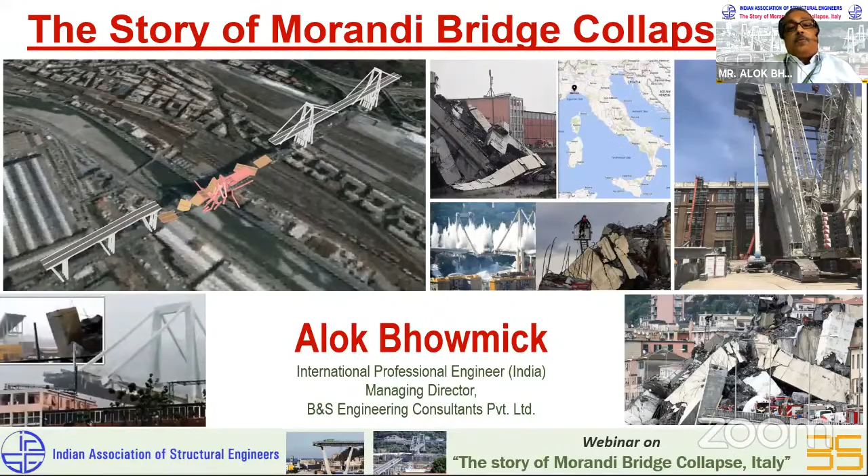This is the broad outline of my presentation. I will talk about the bridge, I will explain the structural arrangement of the bridge. Then I will spend a little time discussing the designer, Riccardo Morandi, and his works. We have to see this bridge design and the failure in the context of the works done by Riccardo Morandi.

We will discuss the history and maintenance of the bridge, what has happened since its construction in 1967 till its failure in 2018.

At present, the inquiry and forensic investigation is still on, the report is not yet out. So whatever possible causes of collapse we will be talking about will be based on information available in the public domain, works done by individuals, academicians, but not the final version. The final version is yet to come. It is hoped that by December, the report will be in the public domain.

Then I will spend some time also discussing the demolition of this partly collapsed bridge, how it is done.

It is a lot of learnings, even from the demolition of the bridge, which took place subsequent to a partial collapse of a particular span of this bridge. I will also spend some time on the new bridge, which is already executed and in service. In a record time of 2 years post collapse, a new bridge has come up there. This whole journey from the collapse of the bridge to the inauguration of the new bridge is an amazing story, which for every civil engineer and structural engineer is worth emulating.

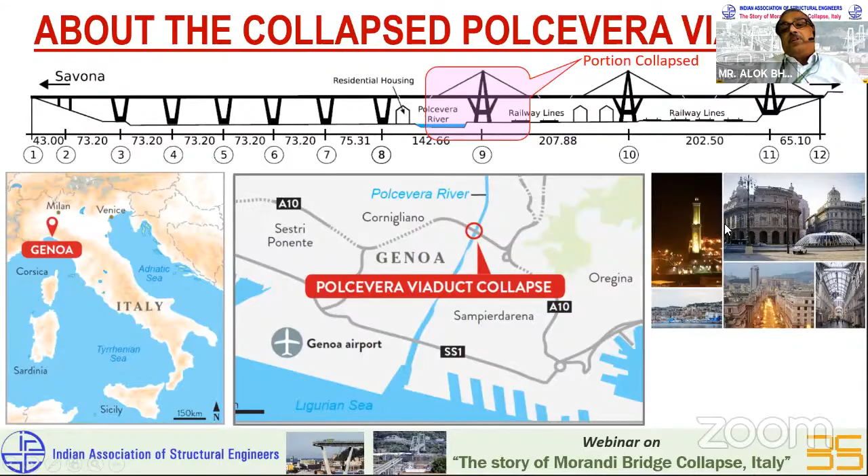What I will try to show you is a small clip of about 35 seconds of the actual collapse, which was captured on one of the cameras. This is just a small clip to show you how the bridge collapsed.

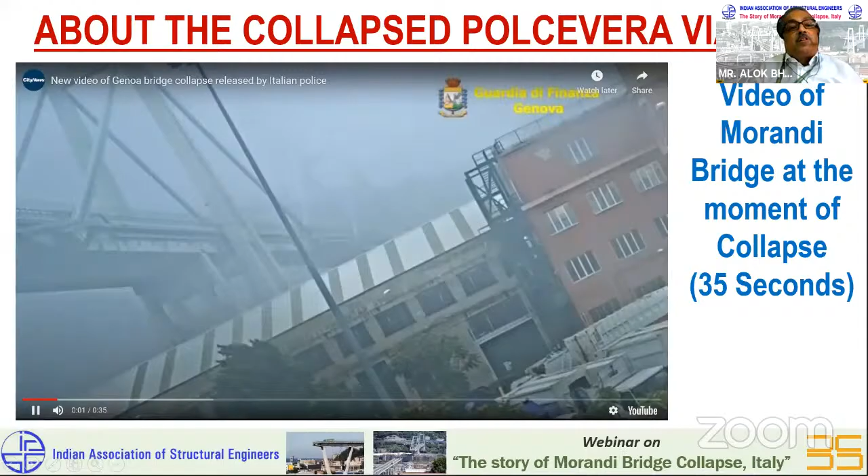Subsequent reports show that the bridge collapsed due to failure of one of the ties of P9, which led 1 out of the 4 at the top to collapse first, and subsequently, because of the torsion, the bridge collapsed. It collapsed sequentially, progressively. Though from the video it is not very clear, this is based on the reports. The most authentic part will come only when we get the final report from the investigation agency.

Now let me discuss a little bit into the structural scheme of the bridge, so that we understand it in little greater detail structurally.

This is a typical Morandi bridge. This is a signature of Morandi. How is it different from other cable stayed bridges? A Morandi bridge is basically a purely concrete bridge. Even the stay cable is made of concrete. The steel is encased by concrete, and therefore it is a pre-stressed concrete tie, which is unique to Morandi design.

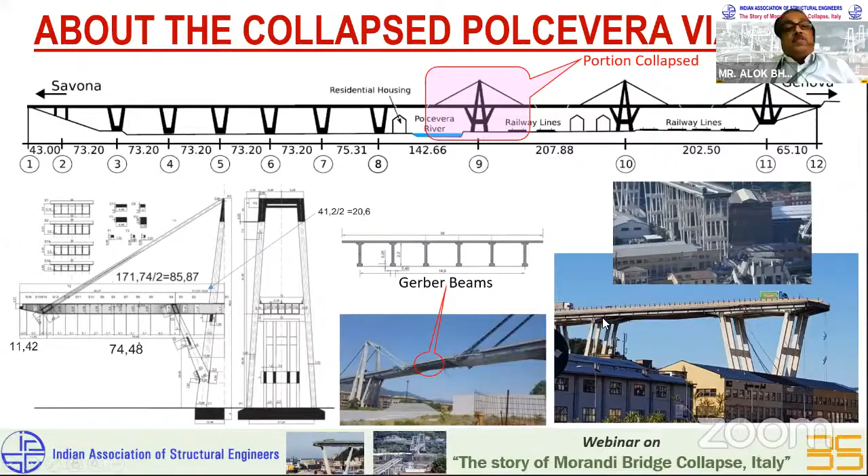This is the kind of terminology they use for the deck, P9, which collapsed. These are stay cables - concrete stay cables. The A frame which supports the stay is called the antenna. As I mentioned, the suspended span is the Gerber beam. This is the deck, which is also very interesting - if you see in between, this is the soffit of the beam. It's a 5-cell box girder, but in between the soffit is missing.

The soffit, if you cut a cross section at the middle of this PSC multi-cell box girder, is there only in three cells continuously, but near the supports where this V-frame is joining, you can see that the soffit slab is full. So wherever you need compression at the bottom, the soffit slab is increased as per the structural engineering requirement.

So one of the uniqueness of Morandi's design is he believed in flow of forces and optimization of design. I think in recent lectures we heard from Professor Holger Svensson about cable stayed bridges, we hear the same thing - there is a lot of emphasis on economy of design and optimization, and I think this particular detailing reflects this very clearly.

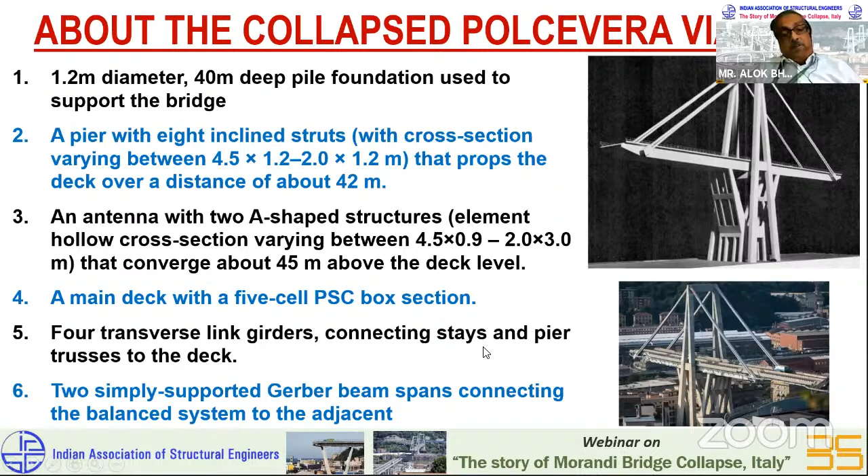Now let me discuss a little bit about the difference between Morandi Bridge and other cable stayed bridges. What you see on top is the typical Morandi Bridge, which has been reproduced only at three places - first in Maracaibo Bridge, Venezuela, followed by this one, Polcevera Viaduct, and at other places.

But one unique thing about Riccardo Morandi is nowhere has he completely copied the design. Every design may look outwardly similar, but there are distinct differences. Whichever new bridge he has done, he has always improved on the first one.

For example, in Maracaibo Bridge, Venezuela, he did not use the encased concrete tie - he used the normal steel tie. But he realized, probably after construction, and while doing this Genoa bridge, he changed the nature of the tie. He encased it in concrete and then did pre-stressing in the second stage as well.

Now the distinction between a normal conventional cable stayed bridge at that time, or even today for that matter, and the Maracaibo or Morandi Bridge, is that Morandi used only a single tie, whereas the conventional practice is to use multiple ties. Today, when we look back, we certainly find this multiple cable-stayed bridge type has many distinct advantages compared to Morandi's single tie.

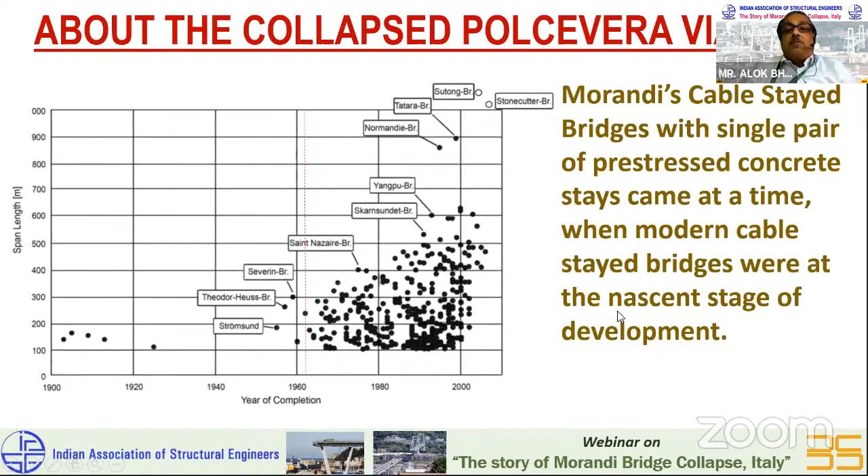Now let me get into some construction details of this particular bridge. Construction photos from the 1960s reveal that traditional methods were used for the design of the substructure. You can see the tall piers, 45 meters high, and this part of the deck was done cast in situ with staging, a very conventional and traditional method. You can see here various stages of construction, which are self-explanatory.

This shot shows each of the three towers: P11, P10, and P9, in various stages of construction. It's a very interesting photograph because in one shot you can see all three stages. In P11, for example, the tie is already in place, and only the Gerber beam or suspended span is left to be placed. In P10, the A-frame is completed and the cantilever part is almost completed, and it's time now to put this tie in place.

And in P9, this is the one which eventually collapsed. You can see that only the central portion of the PSC box girder was completed, and the cantilever construction had yet to start.

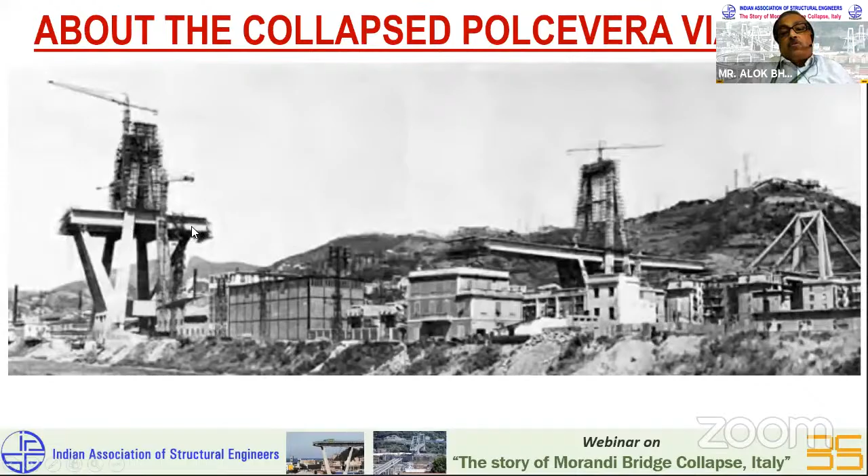This is another picture showing the cantilever construction in progress, a conventional cantilever method. What is very interesting here is the auxiliary strands. On top of the deck you have these auxiliary strands, which are required because we have a very large cantilever, and this cantilever, once the tie comes into place, will no longer behave as a cantilever. Therefore, in the permanent stage you don't require that many cables, and in the temporary stage auxiliary strands are used to reduce the use of permanent cables.

This is another picture subsequent to this, where you can see the cables now being installed, and this is the bottom view. This one shows these auxiliary strands on top of the deck and how they are being placed.

This is a blown up view of the concrete tie, which I want to spend some time on. If you look carefully, this stay cable consists of two distinct stays - you can see a gap here. The concrete stay bifurcates from somewhere here into two separate concrete ties. So if you cut a section here, there are two independent concrete stays, but as you go up, they join and become one. This is the cross section - at one location you see a set of cables, and at another cross section you see that the cables are of two types: the A cable and the B cable.

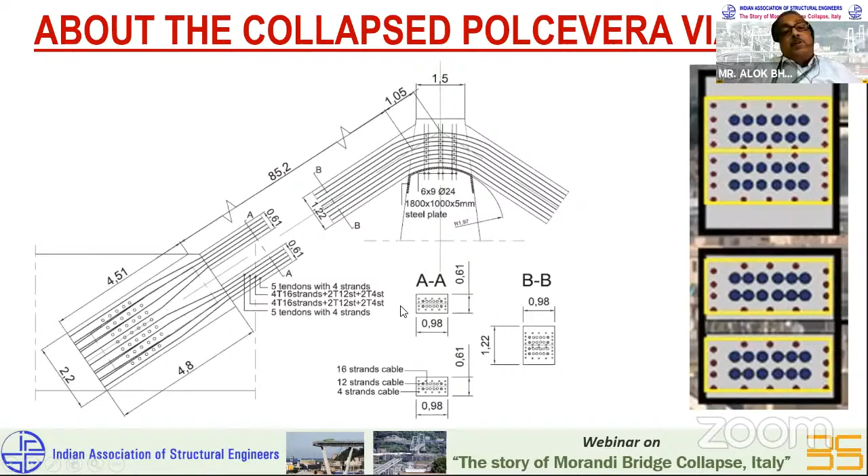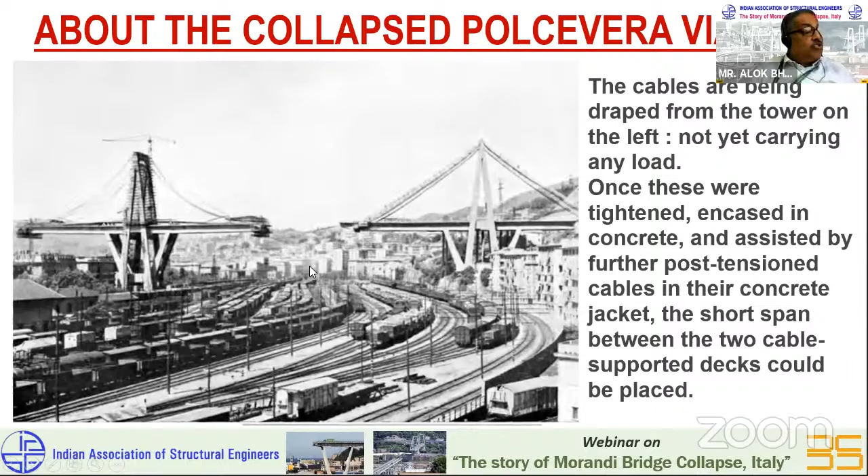This is another picture which shows encasing after stressing, being encased for concreting. All these are invaluable pictures which I could get from one of the journals, which is of course available on Google, you can search and get it.

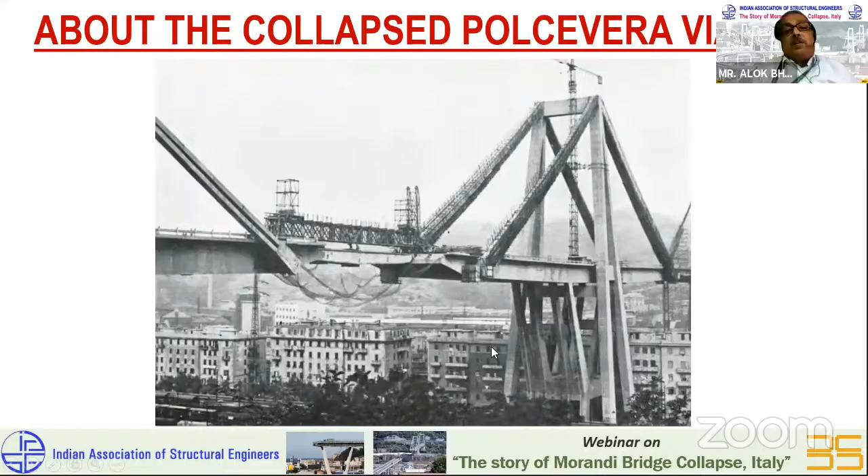This is a picture which shows how the Gerber beam, or suspended span, is being erected by using a truss on top, supported from both side cantilevers, a very conventional method for suspended spans. Only thing is, in this case, the suspended span is pretty large, 36 meters.

The timeline followed for the new bridge post-collapse is amazing, something worth emulating. On 14th August 2018, the bridge collapsed. On 9th February, demolition of the Morandi Bridge begins. In between there are so many activities. On 15th April 2019, reconstruction officially begins with the placing of the first pile. And on 3rd August 2020, the new bridge, which is 1 kilometer long with a completely new design, state of the art, is opened for traffic. So there are a lot of lessons to learn, even in the post-collapse scenario, how the project has been handled.

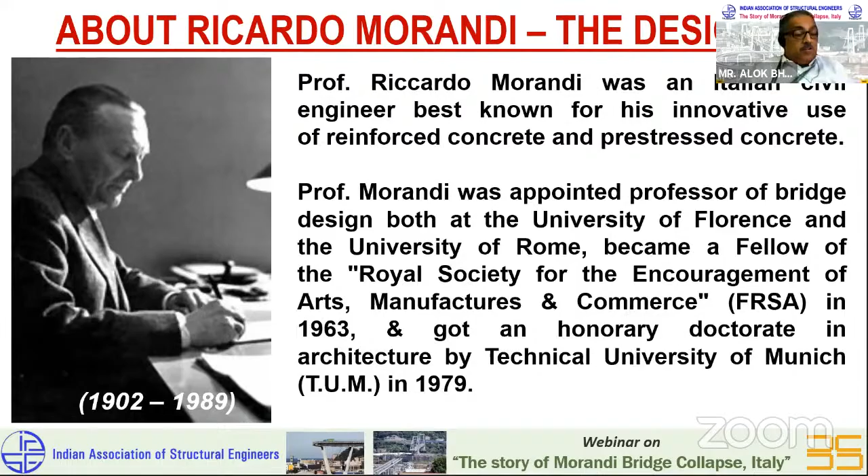Two undisputed protagonists from this era are Nervi and Morandi, and they practiced almost at the same time. They were competing with each other, yet at the same time they had a lot of respect for each other. In many talks Professor Morandi gave, he mentioned Nervi, and many talks Nervi gave mentioned Morandi. They had excellent communication. Interestingly, both had completely different styles of design.

Nervi's design had a trend of slender structures, symmetrical, with static balance, whereas Morandi's structures seem completely different, respecting the flow of forces. It would be a more conventional structure, a little bulky, but both designers always had their own unique style.

Some of the works of Riccardo Morandi: in the initial stage, after his initial 5-6 years in damage assessment of earthquake-damaged buildings, he went into consultancy and started working on large span structures. He started designing cinema halls and became very popular in Italy. Many cinema halls with large roof structures were designed by Riccardo Morandi. In those days, the cinema hall producers, Gemini, were very well known, and practically all the cinema halls of Gemini were done by Morandi.

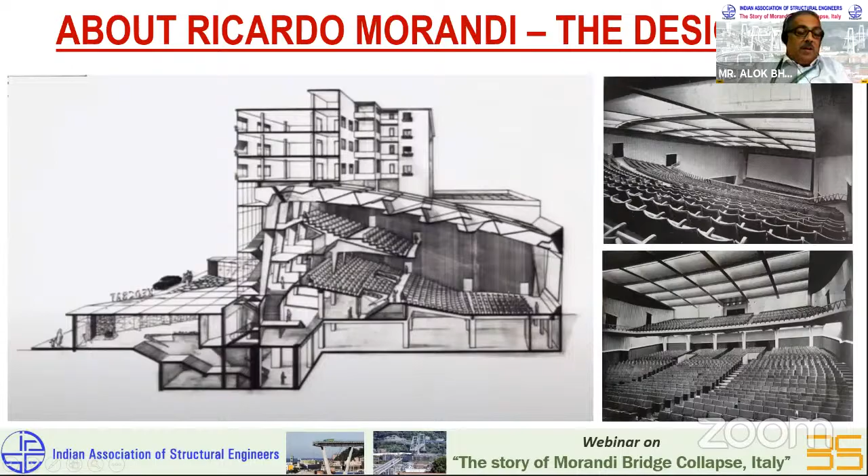Bridges were his passion, and you can see uniqueness in each one. It's not only the cable-stayed bridges, but even the arch bridges had uniqueness. It's very unconventional to have piers which are inclined, and every pier has a different inclination. If you go through the literature, you will note why this inclination is there.

This inclination is done purposely because the deck imparts a frictional force due to shrinkage, temperature, etc., and the inward force is more. So the piers are purposefully inclined so that the net bending moments are reduced in the pier, because the resultant force direction is always towards the crown of the arch, and that is what he has taken into account in his arch designs.

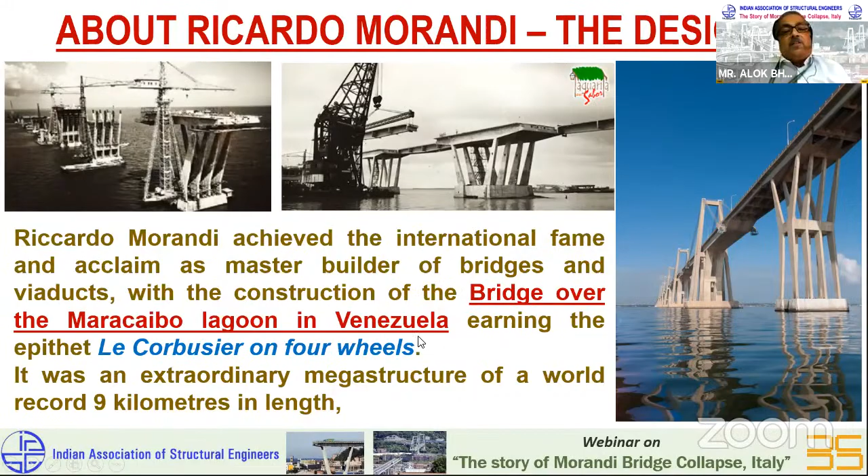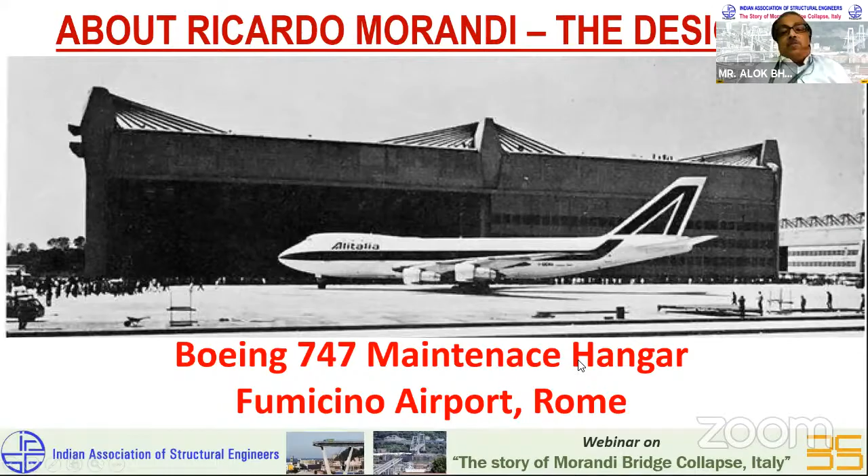There is also another similar airport maintenance hangar at Fiumicino Airport, Rome, for Boeing 747. All these are examples of some masterpieces by Professor Morandi.

Professor Tandon was mentioning in the opening remarks about a hangar, also on a similar concept, designed by Professor Tandon, inspired by the work of Professor Morandi. This is an airport hangar in Mumbai for Indian Airlines or Air India. I would request Professor Tandon, after my presentation, to speak a little about this particular structure, which is exactly on similar lines, with pre-stressed concrete ties.

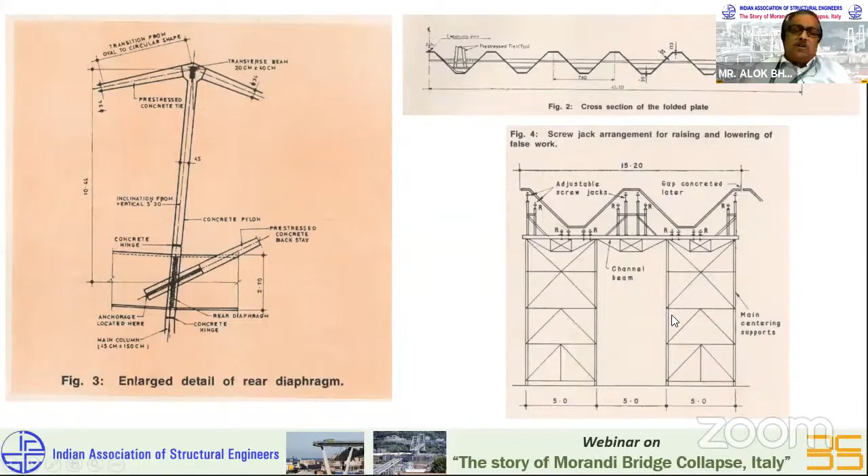This is another view of the same with folded plate. I think there is a lot of uniqueness in this. This must have been done in the late 60s or early 70s. Professor Tandon can throw some light on this later.

I just wanted to share one more thing about Professor Morandi to end this section. There was a lecture delivered by him in November 1961 at the Institution of Engineers, UK. Give me two minutes to read through some part of his speech, which is very interesting. This talk he is giving is on his paper titled Engineering and Architecture. I've just picked up a part of his speech.

He says: I, who speak to you, am an engineer, a structural designer, that is, a man who has been trained by the schools of his day to act as an intermediary between the ideas of the architect and the requirements of the constructor. The man who in Italy is still called the calculator of a work of engineering. I began, therefore, to be a calculator of structures in reinforced concrete. At first, my clients required nothing more of me than a structure which adhered exactly to the dictates of the designer, that is, the architect. Economical, easily built, and statically correct.

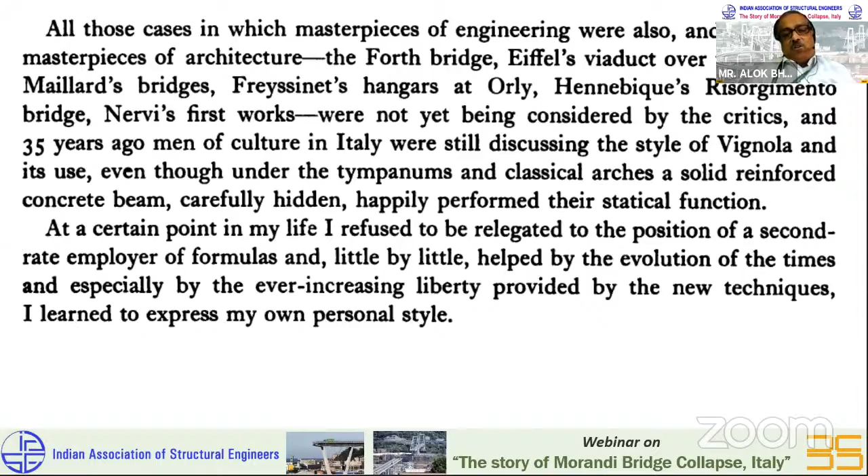At a certain point in my life, I refused to be relegated to the formulas, and little by little, helped by the evolution of the times, and especially by the ever-increasing liberty provided by the new techniques, I learned to express my own personal style. I very much liked this part of his speech, and I think it speaks volumes of what we are facing today, with a lot of lessons to learn from this.

So I come to the third part, which is the history of maintenance of the bridge. I will be quick now—I think it's been an hour, so I should finish in the next half an hour. The bridge had shown signs of distress and excessive deflection very early since its birth. This problem was visible right from the construction. Professor Riccardo Morandi himself was surprised to see the structure age faster than he had anticipated.

In 1979, he was part of the working commission of IABSE, and in one report he detailed a number of interventions to protect the structure against pollution from nearby factories and the salty sea area. This document, available in IABSE, is a paper he published in 1979 discussing the Polcevera Viaduct, in which he mentioned that this bridge certainly requires protection.

I will read from that report. It appears that the structure is struck directly by marine winds. The sea is about 1 kilometer away, which is canalized in the valley crossed by the viaduct. Therefore, it is a highly saline atmosphere, which also encounters, on its way before reaching the viaduct, a curtain of fumes from the chimneys of steel mills, and therefore becomes saturated with highly noxious vapors.

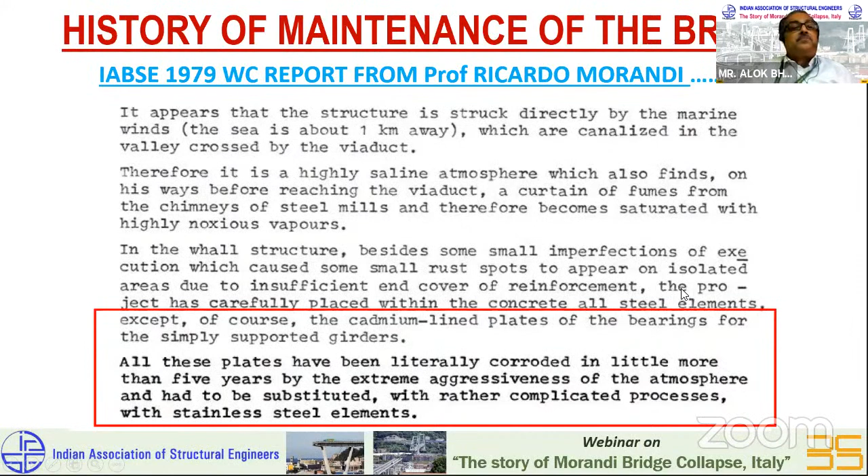In the early 1990s, during maintenance and repair activities, it was discovered that the structure had widespread deterioration, and many interventions were carried out in between.

A major strengthening intervention was done at Pier P11. I think Professor Tandon mentioned in the opening remarks that one of the panelists, Dr. Agostino Marioni, worked on this. I would like to hear from him after this presentation about the strengthening intervention on Pier 11 for the stay cables — extra new cables were added around the corroded ones.

For Pier P10, the interventions were limited, mainly concentrated in the section stretching to the crossbeam at top, as I will show in a diagram. For Pier P9, which actually collapsed, no intervention of any type was contemplated at that time in the 1990s. Attention was focused on the stays, not on the deck, transverse link, supported span, or pier elements. All the interventions and diagnostic reports seemed to suggest problems only with the stay cable, and all the work done was focused primarily on the cable, not much on the deck.

So what you see here are the three piers. At P9 you can see that no intervention took place — this is post-1992. At Pier P10, at the top of the section between the A-frame and the tie, strengthening was done using a steel plate. Whereas for P11, an entirely new set of cables was inserted, external this time, no longer within the concrete, and while keeping the existing cables intact, additional cables were placed surrounding the concrete-encased tie.

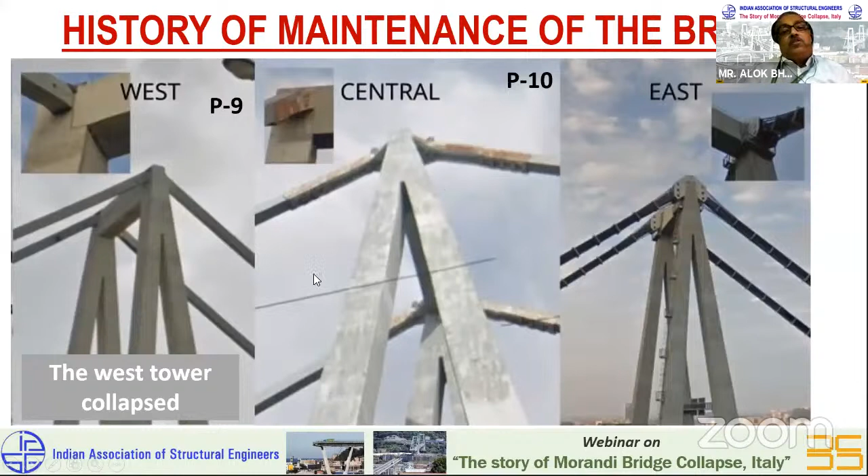This is a blown-up view of P11, where you can see the repairs carried out on Tower 11, and these are the cables visible on the concrete tie. And this is what was done at P10 — a blown-up view showing that this particular junction was strengthened.

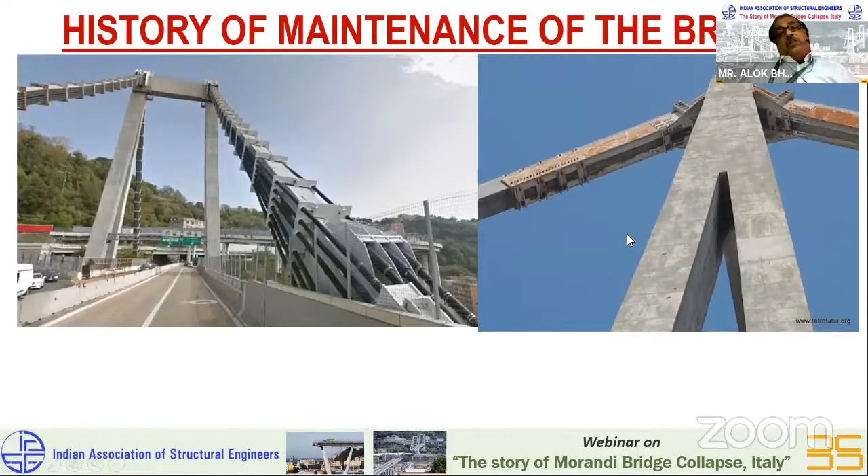But subsequent to 1992, there was further distress and deterioration during the period 2011 to 2016. Many experts thought these were basically due to the 2010 floods, which devastated the area, and this was brought to the notice of the authorities. But unfortunately, post-2010 floods, this Morandi Viaduct was not included in the list of urgent interventions by the authorities.

As a consequence, there was detachment of the concrete cover, which started deteriorating and falling, along with carbonation and oxidation of the reinforcement. You can see the sacks and networks placed to avoid material losses. So basically, the bridge started deteriorating and the deterioration kept progressing, but I think not much attention was given to the degree of deterioration. Probably the authorities did not realize that this would lead to a collapse one day.

If you see the history of the maintenance, absence of injection mortar is seen both in the stays and the deck cables. In two cables in a precast beam, 4 wires were found fractured. This is in 2011, and all wires were found movable by hand, having thus lost any tensioning. In some cases, an apparent loss of post-tensioning is reported in 2011 to 2015, and presence of oxidation and corrosion was also reported of the examined reinforcement, with estimated extension between 10 and 30%. This is in 2015.

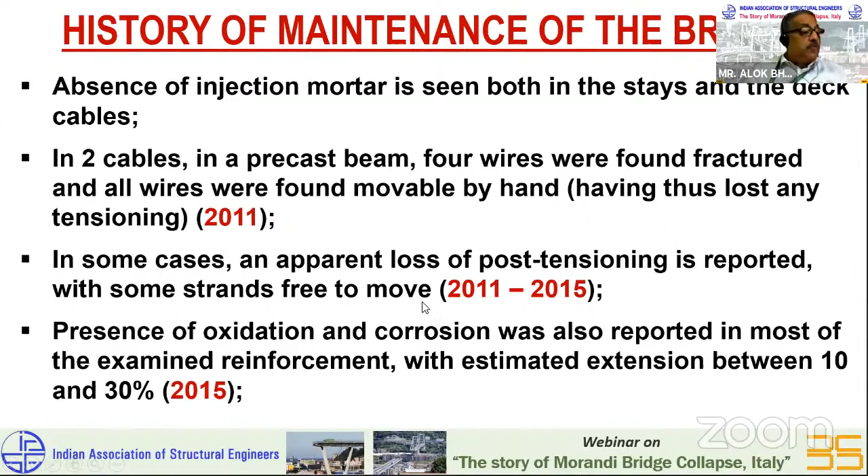So let's come to the possible cause of collapse. There are various possibilities. Incidentally, there is an IABSE paper by Professor Calvi, published post-collapse, in which at that time he was not part of the investigation agency. Subsequently, he became part of the investigation team.

But at that time, he published a very highly technical paper on this particular Morandi Bridge, and these are the possible causes of collapse he identified. One is the construction activities at the time of collapse. It appears that some work was reportedly going on at the foundation of the collapsed span at the time of collapse, though subsequently he ruled that out as a possibility of collapse.

Design and construction errors. Many raised questions about the flawed design of the Morandi Bridge concept with single tie, lack of redundancy, robustness and durability, and flawed assessment of creep.

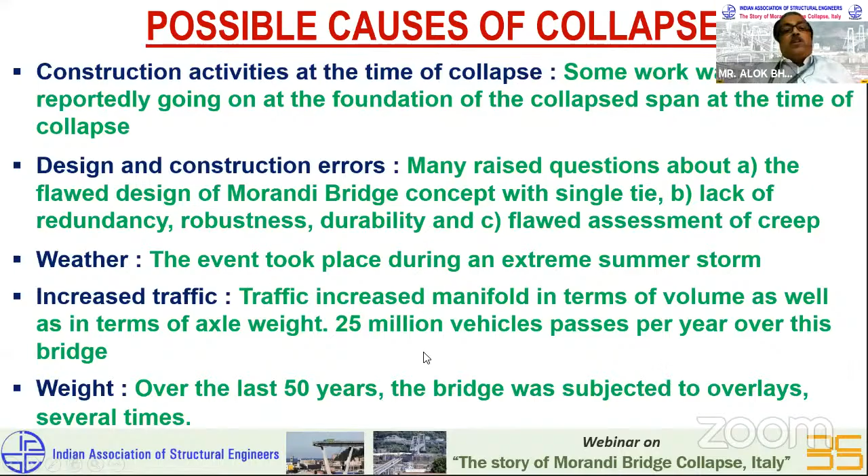Poor maintenance. The bridge needed more attention than it got. Privatization: the bridge was owned and managed by a private entity, not a municipal government agency. They may not have had adequate funds to upgrade the bridge to withstand current demand and meet today's design standards.

Infrastructure issues. The infrastructure spending in Italy has been inadequate for decades. This likely contributed to the structural decline of the Morandi Bridge over time. An accident by explosion due to lightning strike, I mentioned about it. So these are the possible causes, and honestly, the failure could have taken place not due to any one single reason, but a number of them put together.

This is the journal or literature I was talking about, the paper by Professor Gian Michele Calvi and his team. This was published online on 20th of December 2018, and it is a published document of IABSE, Structural Engineering International. Anyone who would like to go into details can read through this particular paper.

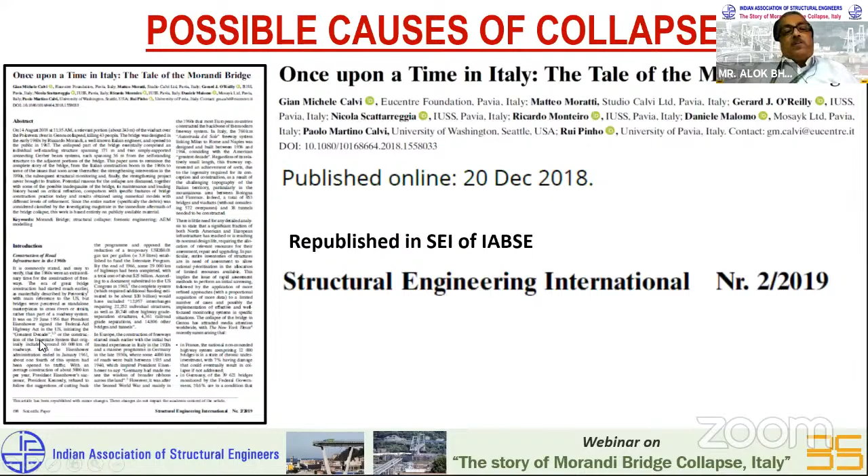So what it does is an extensive study of four possibilities of failure: one, only the stay cable failure; the stay cable plus the deck failure; only the deck failure; and the suspended span as the trigger for collapse. All these four possibilities he has gone into in great detail, and he has sort of covered all the possibilities.

Very interestingly, he used an applied element modeling technique to see the possibility which triggered the failure, and thereafter studied the failure pattern and the debris which was found lying. The one where the debris and the way it failed matched with the collapse mechanism seems to be the most likely reason for collapse. That is how they did the study.

Very interesting. So this assessment and explicit modeling was done in a software called AEM. These are some of the views of that software. You can see the entire structure is modeled.

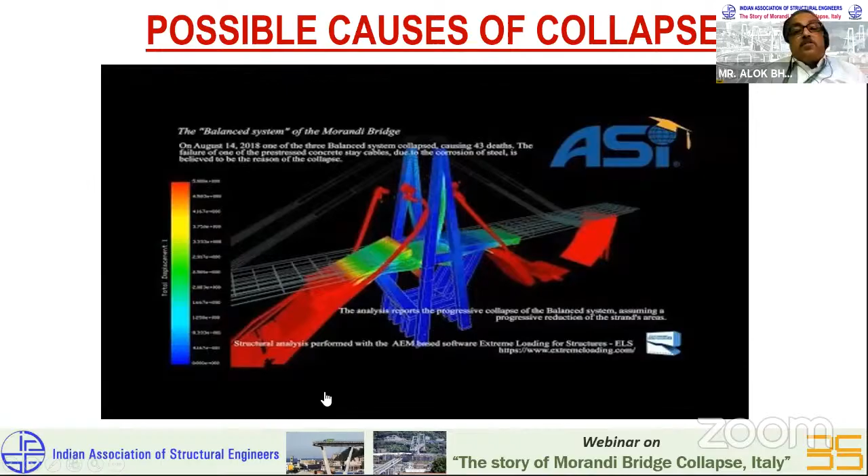Let me see if I can show you a small animation of that, if it is possible. I don't know. I will just show you a small animation of that - it's a 3-minute animation. Oh, it is taking time.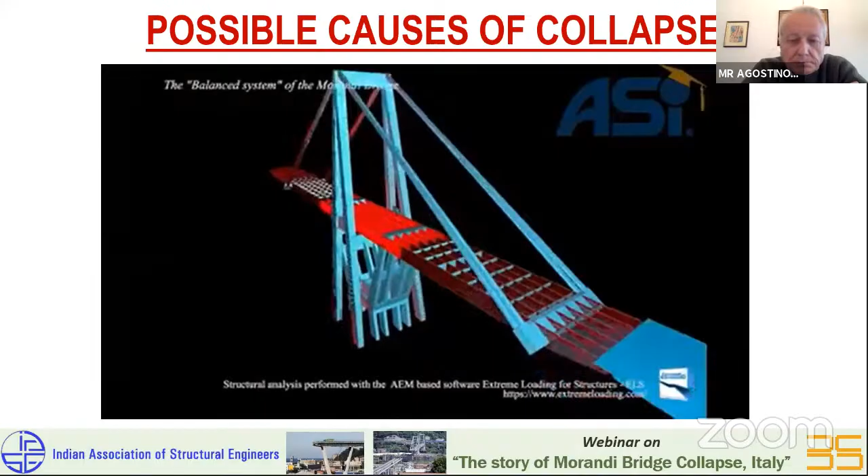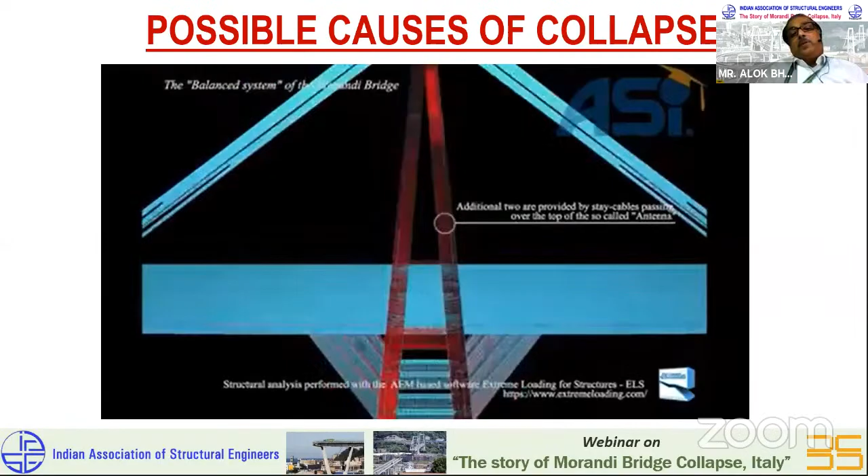The difference between finite element method and applied element modeling is that in finite element method, which we use for conventional structures, there is a continuum. Whereas in a failure, there has to be a discretization, because once it fails, the progressive failure model is inapplicable. So this applied element modeling takes into account the progressive collapse. There is a combination of finite element continuum as well as discretization - that is the beauty of this method. So what it is showing is the various modeling of the various components.

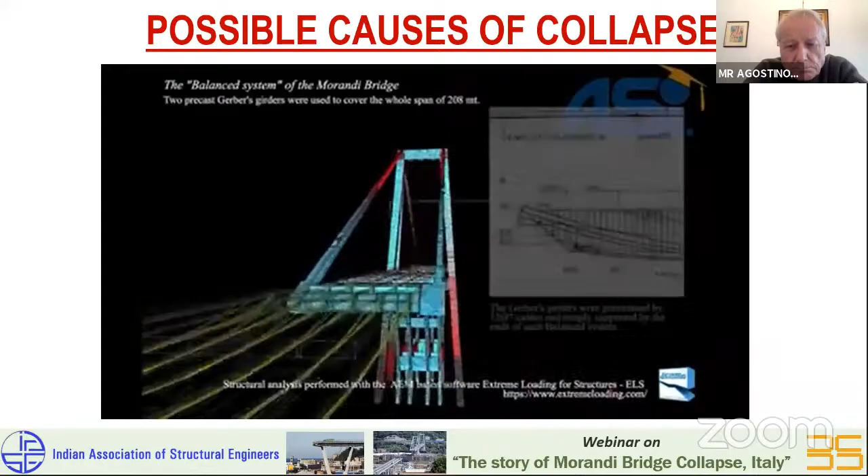These are those Gerber beams or suspended spans, you can see that. So the whole structure is basically modeled, including the pre-stressing and the reinforcement, and it is subjected to various loads. And now you can see the failure.

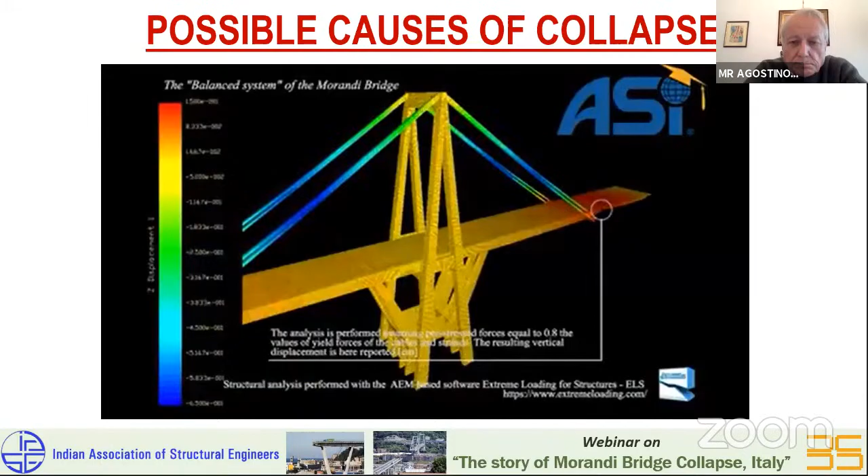This kind of modeling is not possible in finite element modeling, because once the continuum breaks, thereafter it is not possible to handle in FEM modeling.

And now you can see the actual photograph, actual video is being matched.

This is the final outcome which Professor Calvi mentioned in his paper as the possible cause. After doing all these studies, he mentioned that all elements with no exception had ample margin of safety. So therefore, he started ruling out one by one all other possibilities of failure. For example, he mentions all elements with no exception had ample margin of safety towards failure, considering the structure as described at the time of construction.

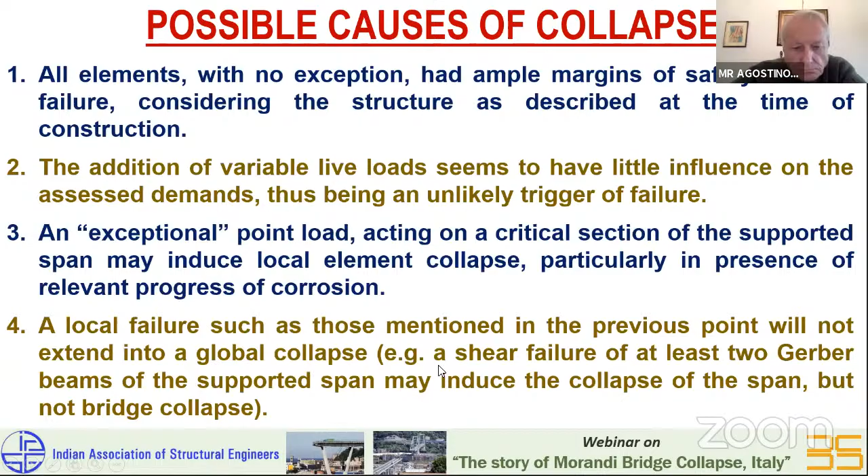This he is talking about the possible likely explosion of the oil tanker. A local failure such as those mentioned will not extend into a global collapse.

The progressive reduction of the steel section and the connected concrete decompression in the stay would result in increased local displacement and significant deck level irregularities long before a near collapse. So it says that if the progressive reduction of the steel section would have given a lot of warning before the collapse - this one happened without a warning.

The structural overstrength is so relevant that the bridge is generally compliant with seismic verification applying the actions considered today. So finally, you go to the last two points, 7 and 8.

The loss of stay seems to be the final cause of collapse, regardless of the initiation of the collapse sequence. The possible initial cause of the collapse may thus be related to fatigue problems in the tendons near the tip of the antenna, or by the deterioration of the connection between stay and the transverse link. These local phenomena have not been explored because of lack of detailed data.

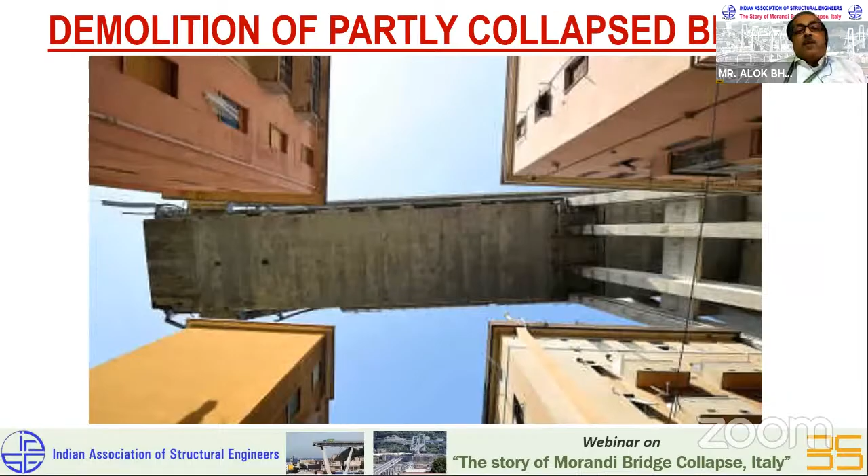Now, let me come to the demolition of the partly collapsed bridge. The bridge had to be demolished because of the precarious situation in which the partly collapsed bridge was, and all the buildings just underneath were under threat. So therefore, the bridge had to be demolished. There was no element of doubt on that. Moreover, the bridge was in distress in any case - even the other components were in distress.

So a very elaborate method was adopted for demolition or deconstruction, as you call it. The dismantling was done by one of the renowned organizations, in Italy or even all around the world, called Fagioli. I don't know how it is spelled, but this is one of the renowned companies involved, specialized in heavy transportation and lifting.

The normal method of deconstruction is always to reverse the method of construction generally. That means whatever sequence of construction was followed, for deconstruction or demolition you can just reverse that process. And that was easily adopted for the approaches, leaving aside the two tower cable stayed portion.

That means because the last item was construction or erection of the Gerber beam, it was first brought down by strand jacks, and then the balance portion of the U frame, the V frame, and the cast-in-situ deck was dismantled, cut into sections, brought down, and then transported outside.

As far as the cable stayed portion is concerned, that could not be done for the simple reason that the original construction required auxiliary stay cables, and there was no way to put that kind of system, and moreover it would have been time consuming. The time was of essence.

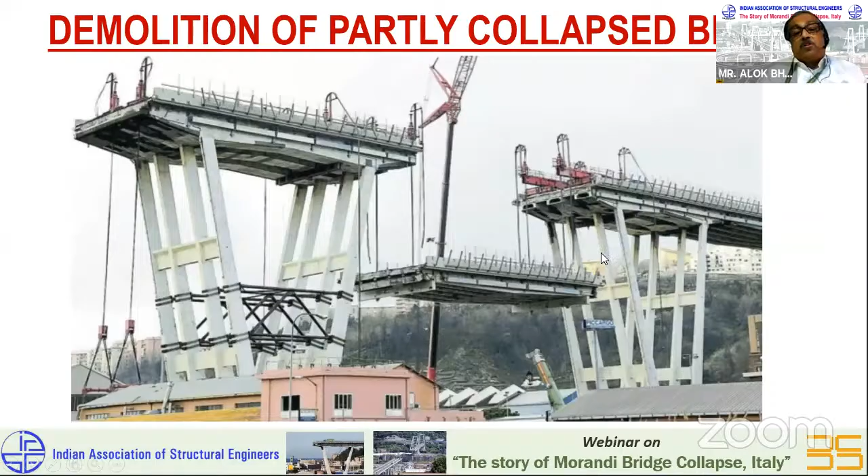What I will show you is a small video on this, which will give you a fairly good idea.

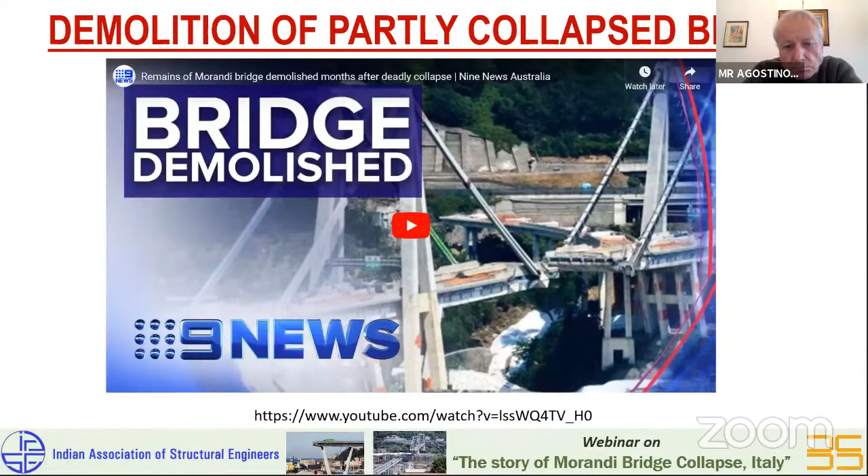The Morandi Bridge collapse killed 43 people.

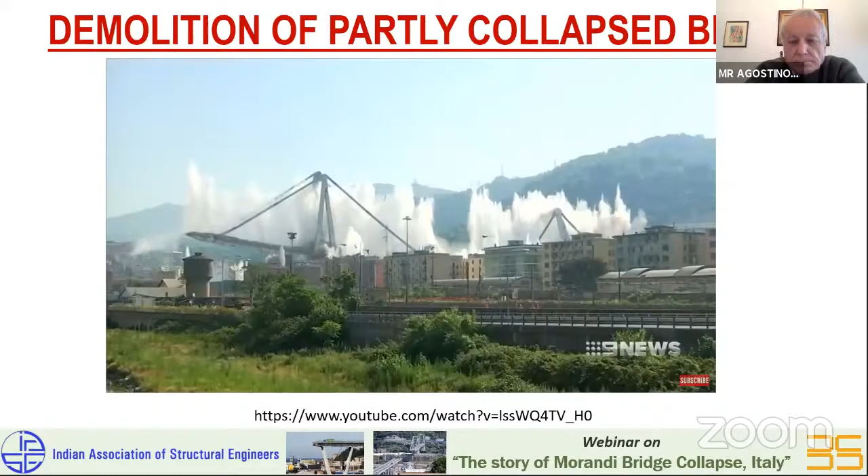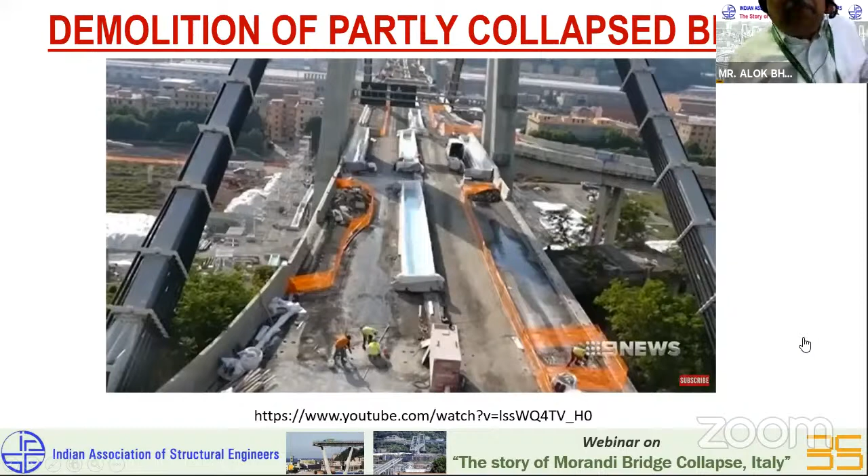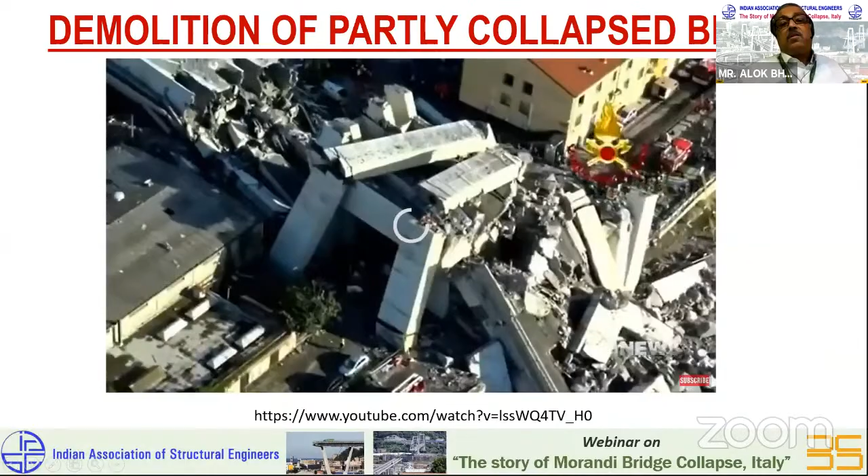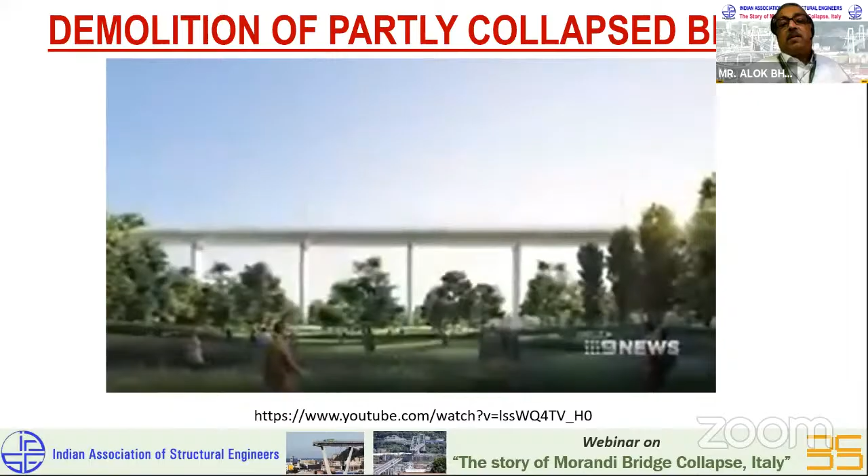I'm sorry for this, I think there's an internet instability problem. I think there is some internet issue. I think we can move forward.

Hello, okay, so just 2 minutes brief on that.

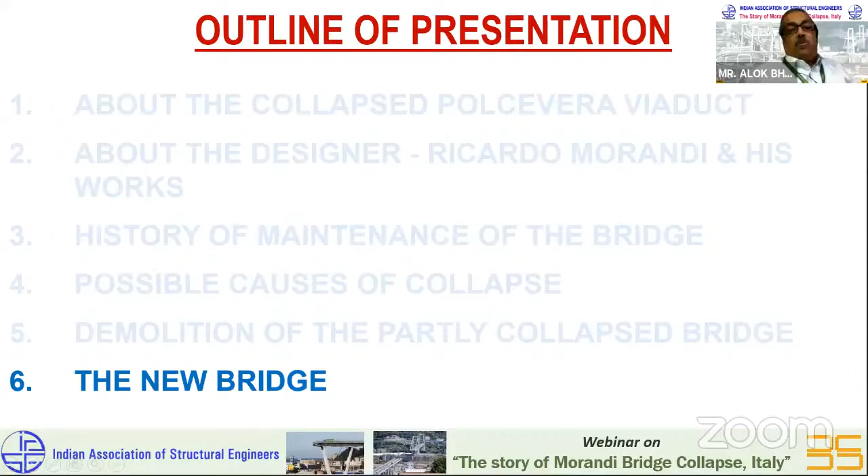This new bridge is now being designed by one famous architect called Renzo Piano. He's a world-renowned architect who volunteered to help rebuild this collapsed Morandi Bridge. He is a native of Genoa and serves as a senator for life in the Italian parliament. He stays with us, being an architect, and he took the responsibility for the design.

The winning design is entirely stainless. The bridge features a continuous 1.1 kilometer steel deck instead of concrete, now with 19 spans.

So this is the team. The architect, director, and supervisor is Renzo Piano, a very famous world-renowned architect. The designer is Italferr, and the contractor and quality control is by this agency, and Pergenova is the contractor. This is a very high-tech job done with 7D BIM technique.

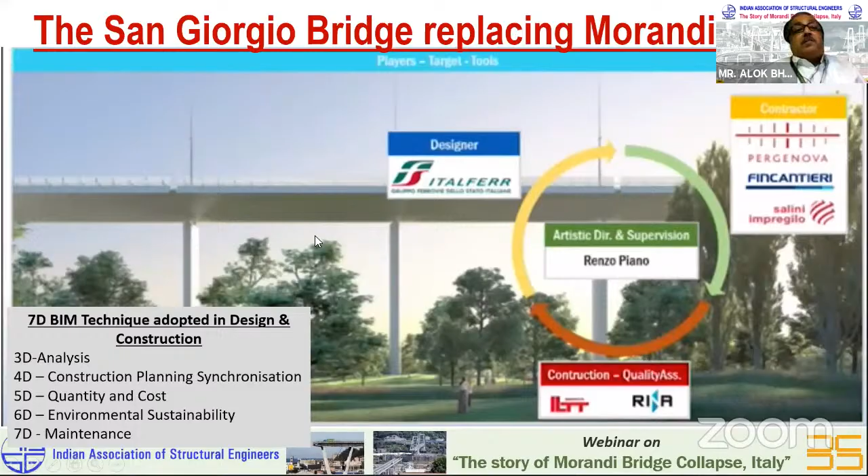I would not like to spend much time on this, but this is a smart and sustainable bridge with a lot of new features, robotic and sensor automation system for infrastructure monitoring. There are special dehumidification systems inside the box for preventing corrosion, with low environmental impact. There are solar cells available; the lighting for this entire bridge is basically from solar panels. There are structural health monitoring systems embedded in this, which help in getting data on a regular basis.

One of the features is special lamps. There are 43 lamps installed, symbolic of the 43 victims of this collapse. This whole design is a replica of different components of a ship, because being a port city, it represents the culture and ethos of the people of Genoa, and that is the theme on which this bridge has been designed.

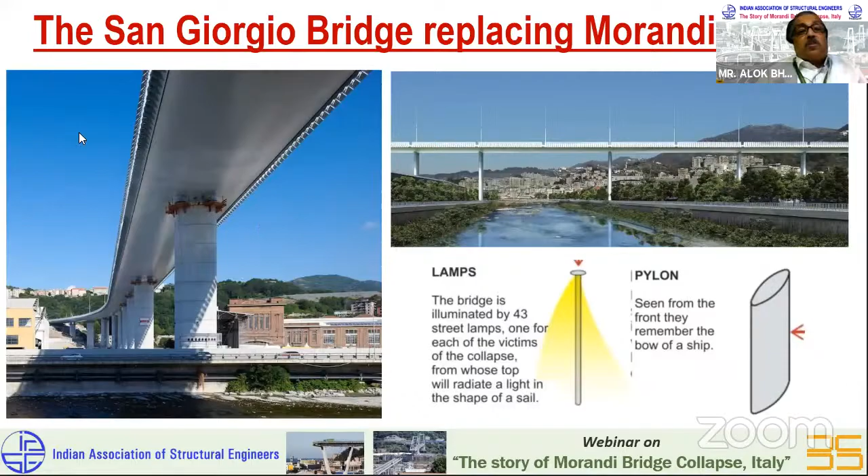These are various pictures of the bridge. It's basically a steel deck with a concrete deck slab on top, but it was done in record time, and the method of construction and design, all are done well. There is a lot to learn here.

There is one more, but there seems to be a problem running the video. Let us see. This is the last video.

So with that, I end my presentation. I think I have given you a broad overview of what happened and what is presently done. Thank you very much.

Okay, so thank you very much, Alok, for this masterful presentation, is all I can say. You have really brought out so many issues in the last 1 hour. It's almost unbelievable. You have started from even comparing the concept of Morandi with cable stayed bridges.

You have talked about Morandi, not only his bridges, but other structures as well, such as those fancy arch bridges with the inclined columns which support the deck, which is something unbelievable. The amount of creativity that seems to drip out of every structure that he has designed.

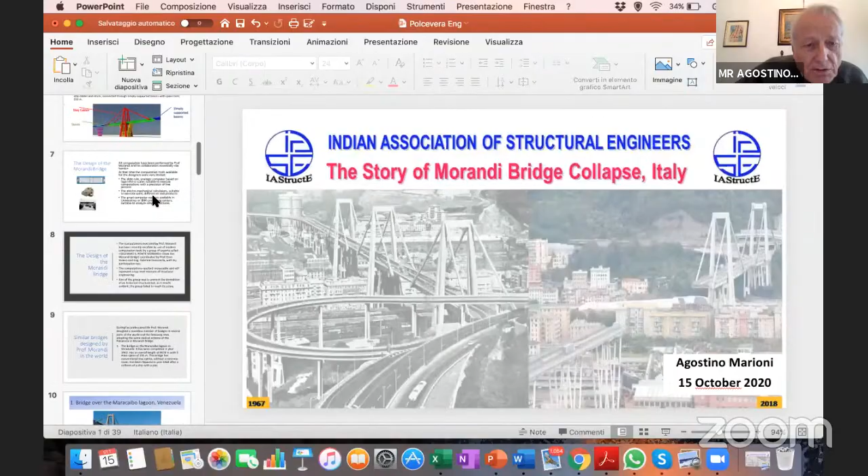Okay, so now I'll skip many slides because Mr. Alok already spoke. I only wish to say one thing, because the computation of Morandi has been discussed, but I was participating in a group called Save the Morandi Bridge, though we failed in our scope.

Now, the company of which I was chairman, company Alga, repaired the bridge in 1993. Why did the bridge have to be repaired? For a construction mistake. If you remember how the construction was done, the stay cables were formed of steel strands embedded in the concrete. But during the construction phase, the steel strands were naked, and they were put in tension basically by the weight of the structure. So during the concreting of the pier, the steel strands had to be kept spaced by a steel truss on top of the pier. But this was for pier 11 that we repaired. The steel truss on top of the pier was weak and collapsed during the concreting, so that all the strands were packed together and were not protected from corrosion.

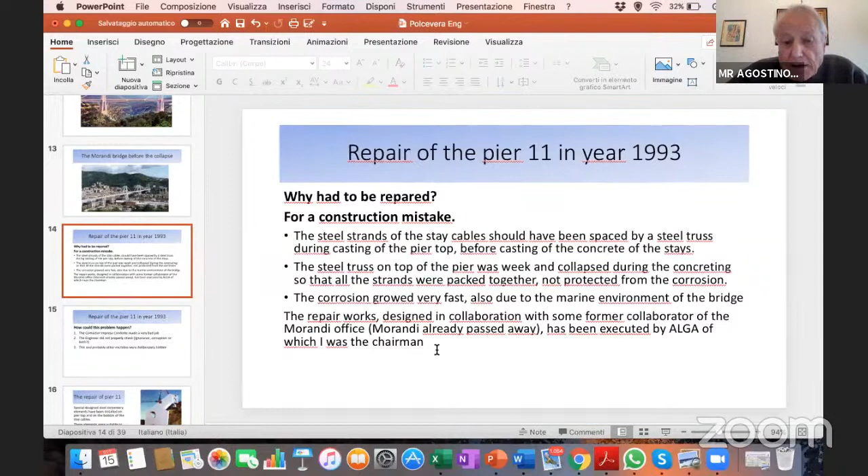So the corrosion in pier 11, in the stay cable, grew very fast, also due to the marine environment. The repair work was designed in collaboration with some former collaborators of Morandi. Morandi had already passed away in '93, and it was executed by Alga Company, of which I was chairman.

Why did this problem happen? I am sorry, but I have to emphasize these problems. The contractor, Impresa Condotte, which belonged to the Italian state, made a very bad job, making mistakes and, what is even worse, hiding these mistakes. The engineer appointed to control the job did not properly check.

This can maybe explain the collapse that happened in 2018.

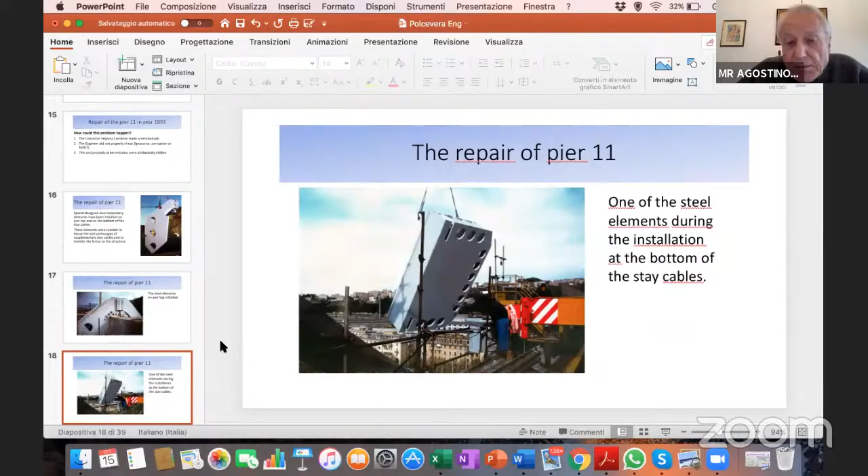The repair of Pier 11 was made by adding specially designed steel carpentry on top of the pier, suitable to house the anchorages of supplementary stay cables. Here you see the steel carpentry on top of the pier, and this was the element at the bottom of the stay cables.

The supplementary stay cables were added around the concrete stay. The concrete stay was not demolished, because this would have altered the stiffness of the bridge, but it could not simply be cut, because the concrete was in compression—inside, the strand had a very high tension. So cutting the concrete would cause a big compression in the concrete, and the concrete would fail. So this was like a surgery operation.

The installation of the new stay cable and the tensioning of the new cable was a surgery operation, because while tensioning the new stay cable, we had at the same time to deactivate the tension inside the existing stay.

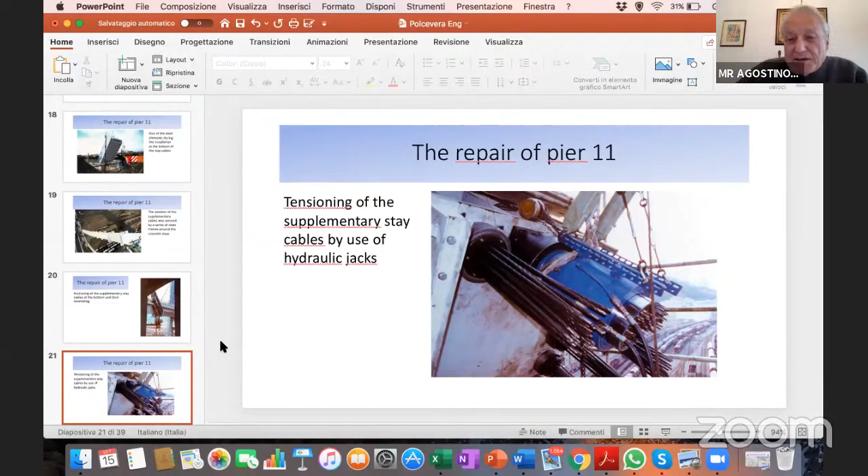Probably similar defects were inside the other piers, but what was the difference? In Pier 11, the defect was very evident because the corroded strands were near the surface—you could touch the corroded strand with your hand. Probably in the other piers similar defects existed, but it was not possible to detect them with the existing investigation tools.

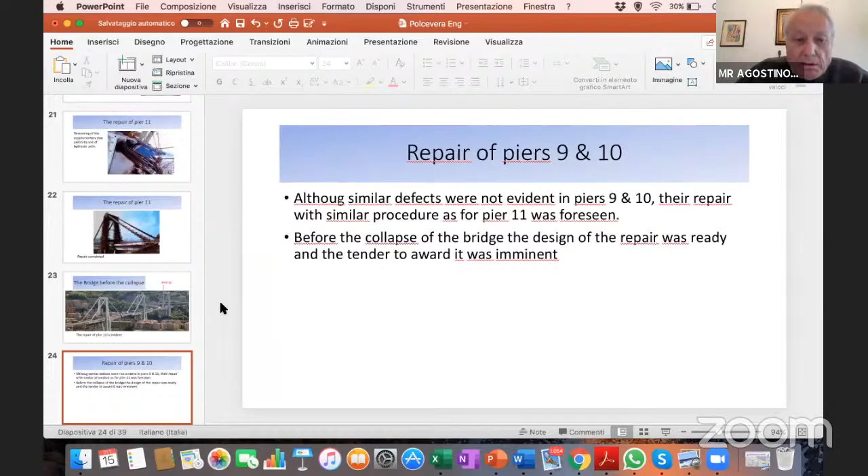Now we can only make some conjectures, since the judiciary investigation is still pending and some documents are still secret under investigation. But the most credited hypothesis is that the collapse started with the failure of one stay cable of Pier 9.

What is also important to say is that recently the concessionaire of the bridge, ASPI, Autostrade per l'Italia, officially filed a claim against the Italian Ministry of Public Works, because they say that when they took over the concession of the motorway, the bridge was affected by a hidden defect that could not be foreseen by them. So they are claiming the collapse is not their responsibility. But of course the judgment is still pending, and we don't know how long it will last.

What is also interesting is that the last vehicle that transited on the bridge before the collapse was a truck loaded with a steel coil of 35 tons. The truck was on the simply supported beam adjacent to the collapsed stay cable. That span fell down with the truck, its load, and the driver. The driver, miraculously, survived and provided valuable information.

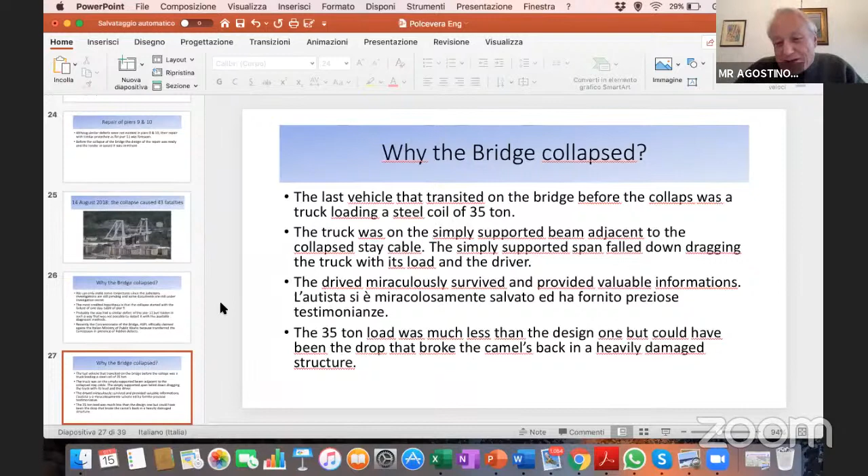So the primary reason for the collapse most probably is bad execution, aggravated by lack of controls, or the impossibility of controls, during and after construction. A bridge of such importance should have a safety factor of more than 2 on the design load and more than 100 on the load of a single truck, and should have a service life of over 100 years without major maintenance. That was not the case.

As was already mentioned by Mr. Alok, the dynamics of the collapse have been investigated by Professor Michele Calvi, using a mathematical model and considering the initial failure of different elements—first making the tie collapse after the beam. But what is interesting is that another professor, Professor Domaneschi of the University of Turin, compared this with the available data.

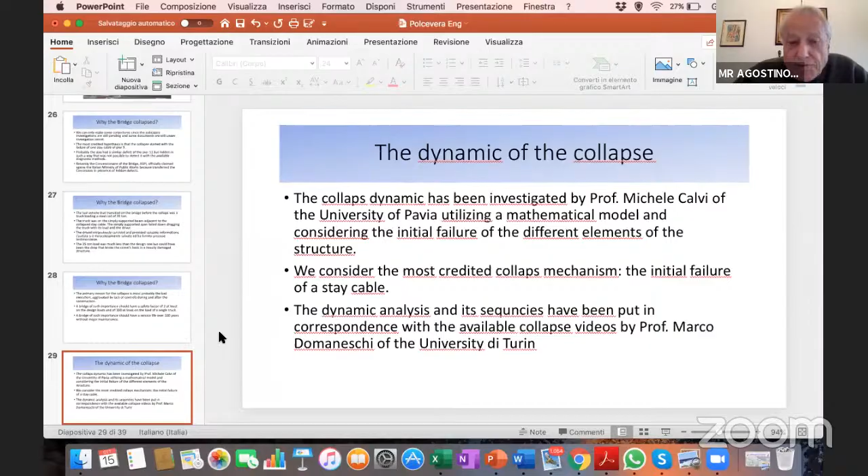These are the main aspects of the dynamic analysis of Professor Calvi, and he put in parallel the sequence of these figures, the dynamic behavior, with the available videos.

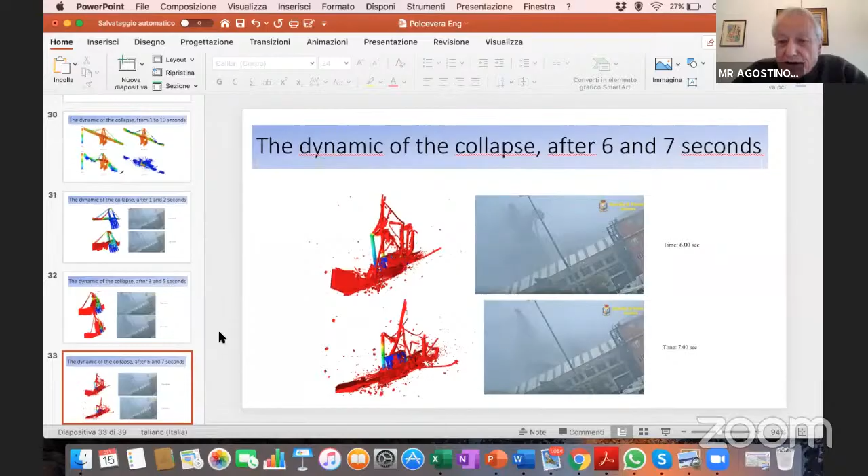It's very interesting that the hypothesis of collapse of one stay cable matches approximately, quite good, with the available videos. You see, after 1 and 2 seconds, it becomes less evident, but still works after 3 and 5 seconds, and after 6 and 7 seconds, and after 9 and 11 seconds.

I don't speak about the new bridge because Mr. Alok already spoke very well about it, so thank you for your attention.

Thank you, Dr. Marioni, for giving us an insight into whatever repairs were done prior to the collapse, not on what collapsed, but the neighboring pier. May I now request our very own Dr. Harshavardhan Subbarao to give his comments.

Thank you, Professor Tandon. Alok, I want to congratulate you on a truly marvelous lecture, an outstanding lecture. You touched upon so many issues, as our moderator said, each worthy of a debate for later time. You've set an agenda for us all to take up, and further issues will arise from what we've learned from your presentation today.

On the point of issues, there are many things I'd like to say. First, I'd like to tell you about forensic engineering. The paper which Alok speaks about was actually from a forensic engineering group where they came to us for review. I'm the chairman of this outstanding paper award committee, vice chair now. I was chairman then, and we were completely stunned by the quality of the paper and investigation.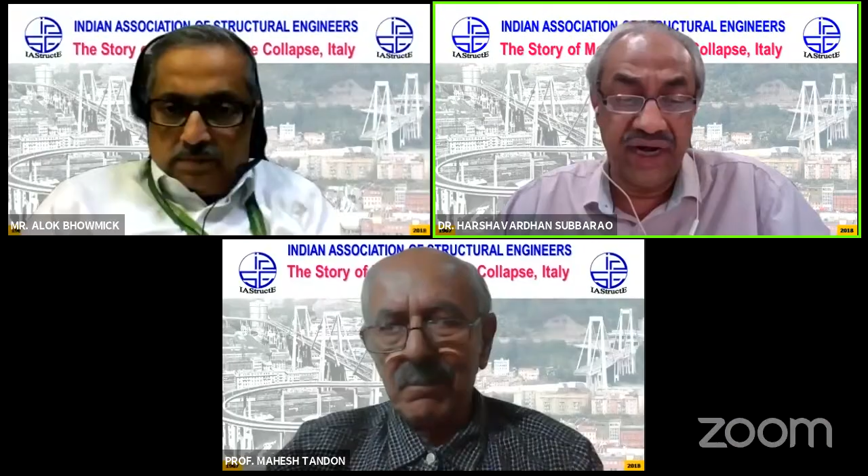The professional practice of forensic engineering - I want to read to you from a 2017 special edition of the IABSE journal. It reads in the introduction: the professional practice of civil engineer of forensic structural engineering includes discussions of what structural failure is, the origins and causes of failure, types of cases of failures, importance of codes and standards, the standard of care or duty of care of design professionals, and duty to perform for the contractors. A brief outline of the processes of forensic investigation is always enshrined with references to detailed publications.

To back this up, as Alok has demonstrated today, excellent research he has done from the net, from Professor Calvi's paper which won an award, as I told you. The story has been put together for you of an outstanding bridge and the lessons we have learned today. But notwithstanding that, the Maracaibo Bridge is still in existence.

Many of Morandi's bridges are still in service of the same structural type, although we may say that they lack redundancy, therefore they lack robustness, because there is only one set of ties, and failure of any one tie will lead to the collapse of the whole bridge. There may be postulates of an explosive load, an impact load of any form, or the Gerber span failing due to shear failures on the half joint.

These are all postulates until we get to see the wires and understand the fretting fatigue that might have happened, understand the way the wires and strands have failed, if at all, their loss of diameter and therefore the loss of carrying capacity. We will not be able to exactly conclude even the most probable cause - we have only now got down to a set of probable causes, not the most unique cause. That is what I want you to understand.